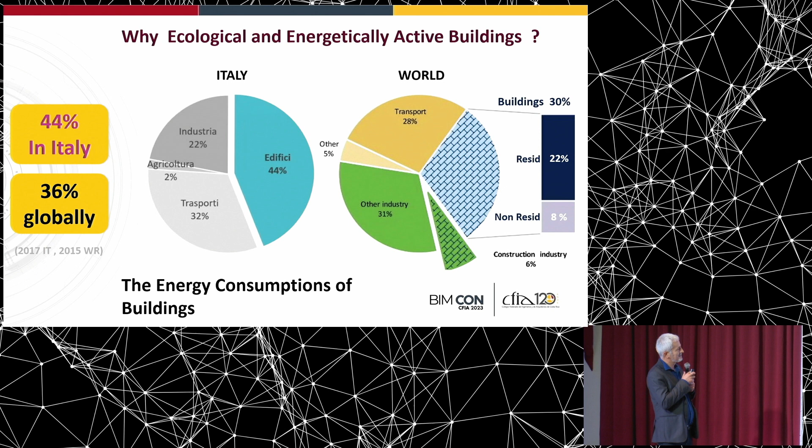What does it mean? Of this 36%, 22% is in residential buildings and 8% in non-residential buildings. It's a lot. And energy is one of the aspects. The other aspects can be measured with different methods, with the ecological footprint or carbon footprint, let's say the impact in terms of CO2. And in this case, buildings account for 39% of the CO2, the GHG emissions. What does it mean?

That it's not only the buildings themselves while they are working with heating, lighting, ventilation and so on. It's also the process to build, sometimes also to demolish the buildings. So the chain is quite complicated. You have to think of a life cycle assessment. So the origin of all these materials that compose the building, the raw materials, the transportation, the manufacturing. Finally, we have the building. We start using the building for 10, 20, 30 years, but then the building has a history and can be demolished, for example, or transformed.

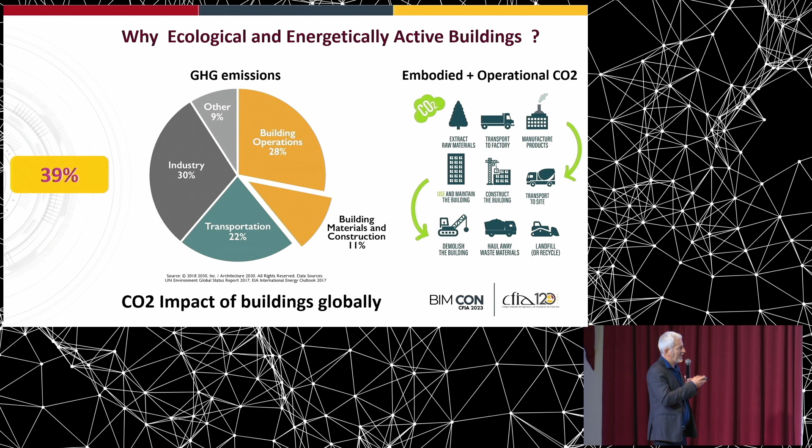Well, to calculate this footprint, this impact in terms of CO2, is complicated. This is the full frame of all the steps in the life of a building, from the original material to eventual recycling after the demolition of a building. And the life of the building is just these two steps. So it's much more complicated to analyze the building before it exists and after.

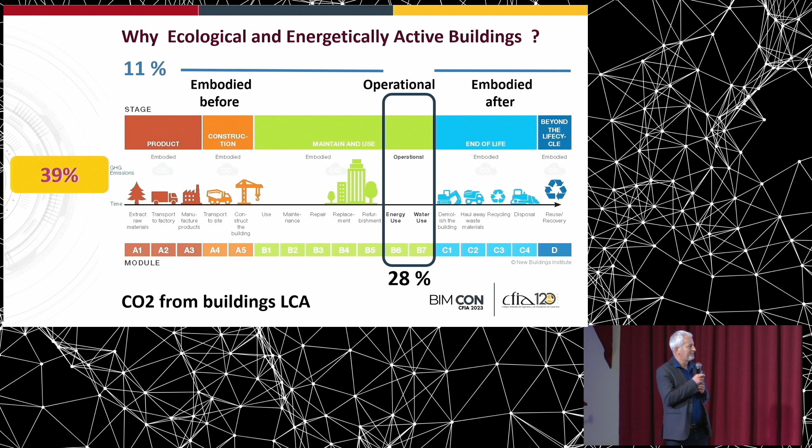Why do we talk about this? Also because we have some targets. In Europe, there is the Energy Performance of Buildings Directive, a new one updated in 2023, that talks about climate neutrality by 2050. But to reach this, first of all the new public buildings in 2026 have to be zero emission, and then all new buildings, of any kind, from 2028 also zero emission.

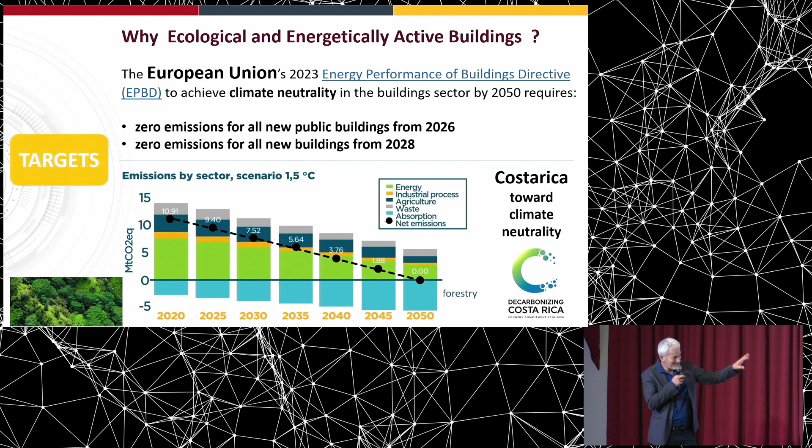What about Costa Rica? There is an interesting plan in your country. I studied it a little bit, and it's very ambitious, because you also have climate neutrality by 2050 with the use of forest compensation, a great resource that we don't have in Italy. But in this analysis, I didn't find the impact of the buildings. It's not considered. Probably it's mixed inside the others.

Then another reason to talk about this: the materials, what we call construction and demolition waste. Consider that in Italy 30% of the waste is construction and demolition waste, coming from the dockyards, the works during construction, or also in the demolition phase. But in some countries it can reach 50% in volume. So it's a huge impact. And inside this construction and demolition waste, we have a lot of material. We will see something about this later.

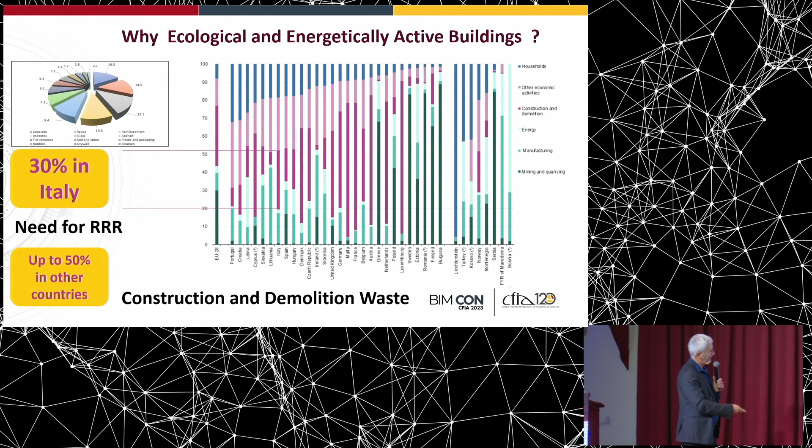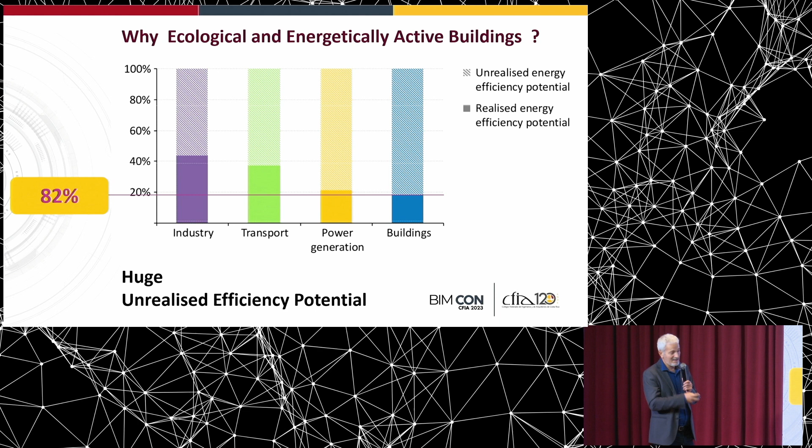And furthermore, there is a huge unrealized efficiency potential in buildings, much more than in industry, transport, and power generation. Why? Because we have already dealt for many years with the efficiency of industry, the efficiency of transport, also the power generation sector, but we did really few things in buildings. So it's time to do it. That's why the research is about the energetically active.

Because around this research we can actually talk about a lot of things, about the transformation from the passive building to the active building. Passive building is a concept, let's say, quite old. Active building means that in terms of energy, the building produces more than what the building consumes. It has to be this mix, in Italy of course, but also in Costa Rica, I think. Anti-seismic measures are needed.

We have to use innovative materials, ecological or either recycled or recyclable materials that don't travel too far, so typical or local and low carbon. Furthermore, we have to apply the principle of the life cycle assessment to analyze any part of the building and the history of each element that is in the building.

Then we have to introduce renewable energy sources and, if possible, connect the building to the other infrastructure or the other buildings around through the model of the smart grid or through the new model, the energy community. And then the building is in a territory, so it has to be compliant with the regulation in terms of urban planning.

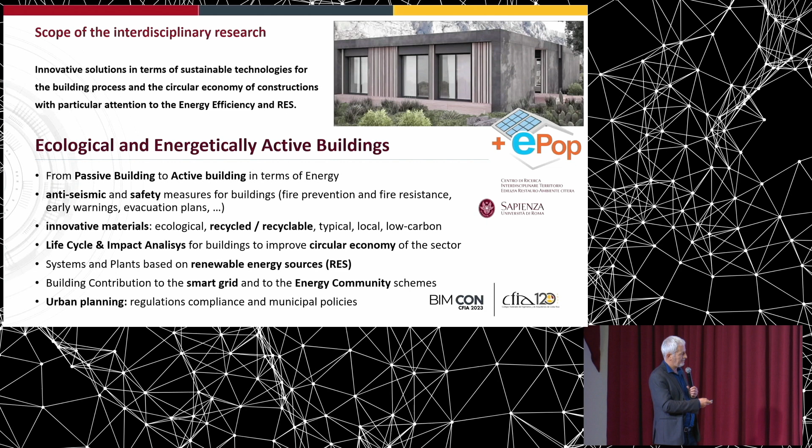Then there is a need of a BAC, a building automation and control system, also monitoring and surveying what's happening inside and outside the buildings. If you want to talk about quality, it's now very easy. There are a lot of sensors that are very cheap to analyze also the VOC and the pollutants that can be inside the building or outside.

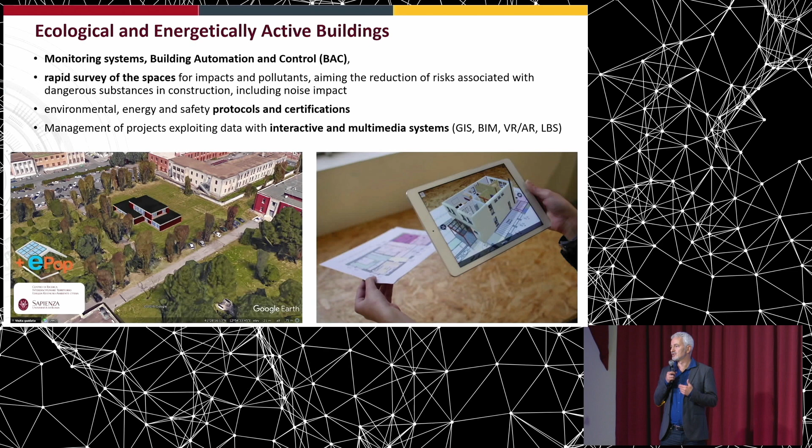There are also a lot of certifications that can assure that the materials are effectively ecological, and environmental protocols that we can apply to a building in any phase of its life. And then finally, the research focuses on interactive and multimedia systems, so also augmented reality in particular, to facilitate the process of the design.

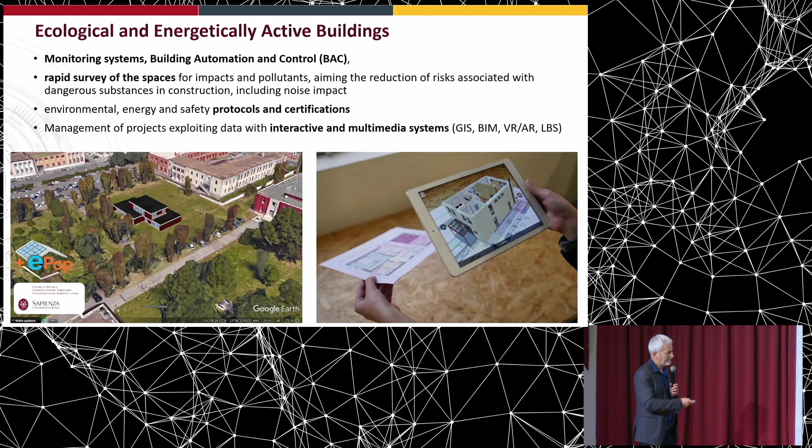The previous research of our team in Sapienza was mainly about the zero energy building. It is quite a well-known concept, or near zero, some say near zero energy building. Well, the challenge is to transform it into an active building, so with a positive contribution in terms of energy. But to have an active building that is also compliant with circular economy, there are a lot of criteria.

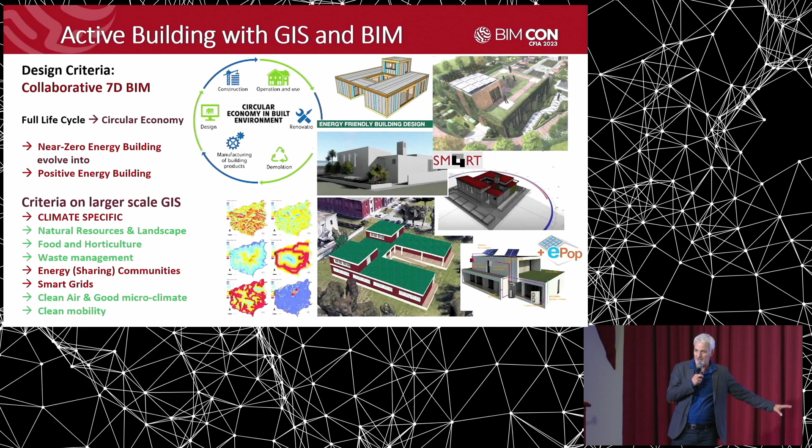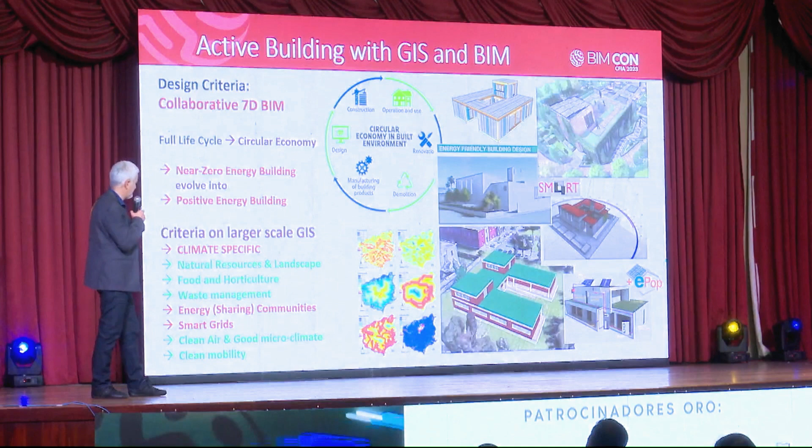And this is not only work that we can do in BIM, this is work that we have to do also in GIS. Because the building, for example, has to be climate specific. A building in Italy is not the same as in Sweden or in Costa Rica, of course. And so these are part of the themes that have to be analyzed around the building.

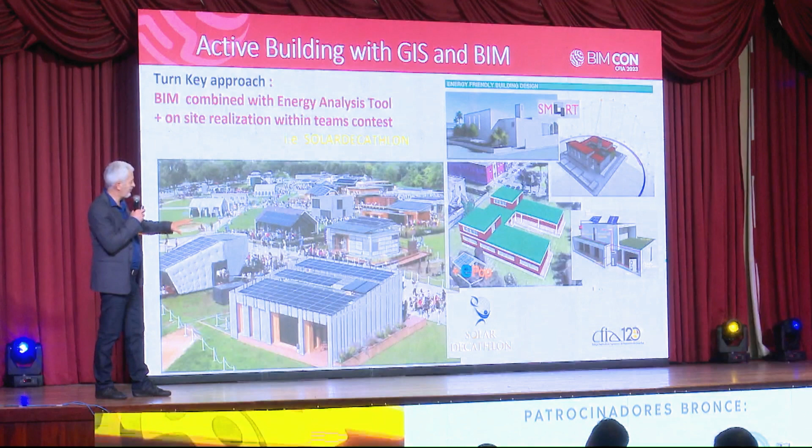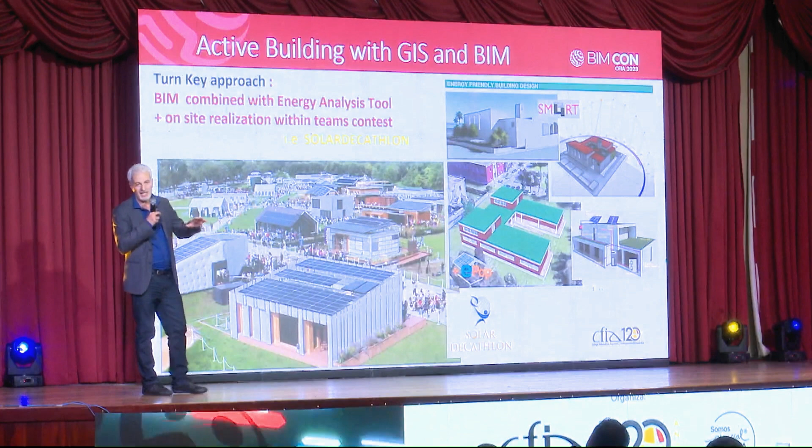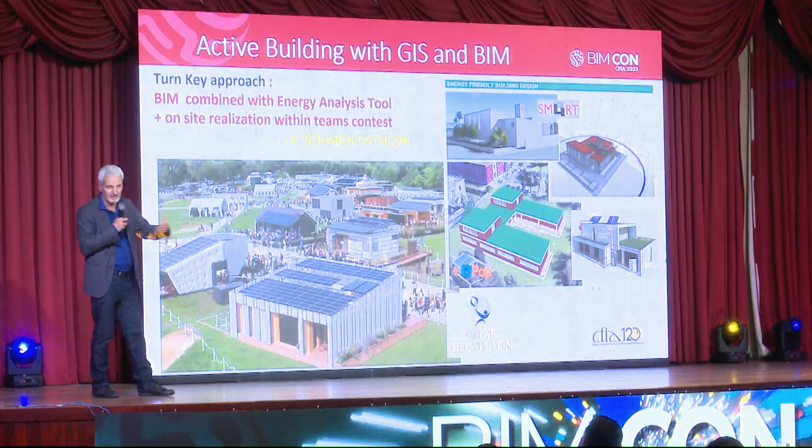Some of my colleagues participated in the Solar Decathlon. That is a competition for fast builds that are realized turnkey, let's say, that have to be energy efficient at the maximum. In this kind of contest, there are university teams, research teams, and it can be in different places. So the challenge is to adapt also the building to the climate, to the conditions of the country.

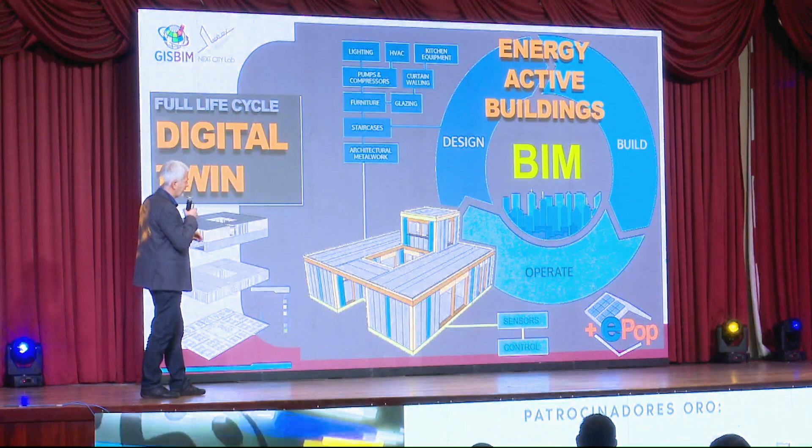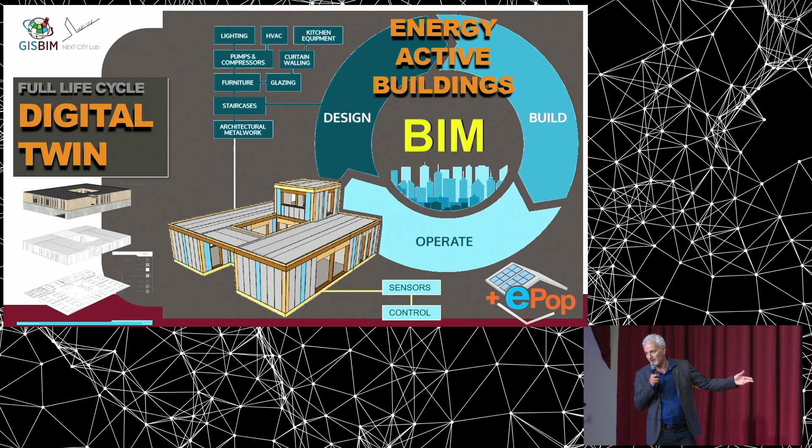Well, what we are talking about is a specific project that we developed with this startup, EPOP, led by an engineering team called Ecomedia, within a consortium with other partners, mainly startups. The idea is to have an energy active building, starting from the design, the simulation of this building, but then also to realize the building. It is not, let's say, the usual university research, which normally stays in the theory. In this case, thanks to the contribution of the startup company, we managed to realize it.

The mission in particular is to realize a building, a wooden structure, complete with plants, of course, that is an active building, so it gives a positive contribution in terms of energy to the neighborhood, and to use it as a living lab. What is a living lab? It's not a new concept. It means that it's a laboratory where you can use the structure itself to test materials, to test plants, to test equipment, so it's something, let's say, more than a normal laboratory.

The idea of the smart living laboratory is based on these three concepts that seem to be the same but are slightly different. The active building; the positive energy block, where block means more buildings that are near each other, because we are talking about sharing the excess of energy; and the idea of the energy community, which is more recent. It's a virtual sharing of the energy that can be made not only by connecting this building to another one that is in proximity, but also through the grid at a certain distance.

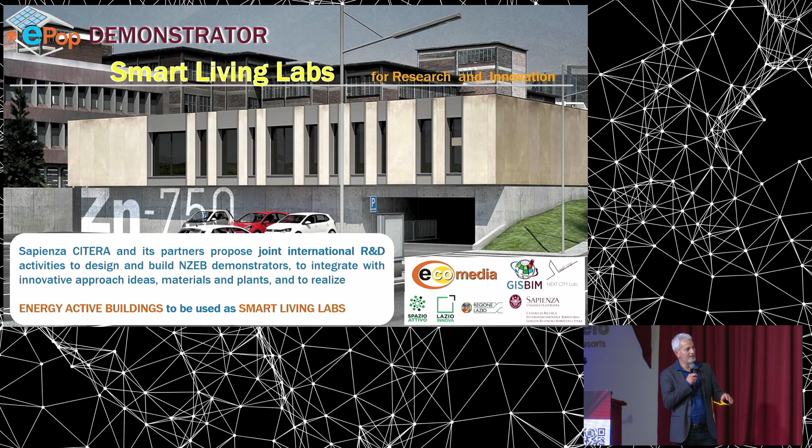Furthermore, we proposed this idea of the smart living labs also in other countries. I will show you also we managed to realize one of these laboratory demonstrators in Italy. Well, this is not a rendering, this is a real one. It's not big, as you can see. It's 120 square meters, but it's working. It's real, and it's monitored since 2 years already.

And it is a passive geometry, so well, very modern as a style. This shape in the entrance gives a solar contribution inside the building during the winter. This is designed for the Italian climate. Should be, of course, different in other places or latitude. There are only ecological materials. It is a class A4 in terms of insulation, of energy efficiency.

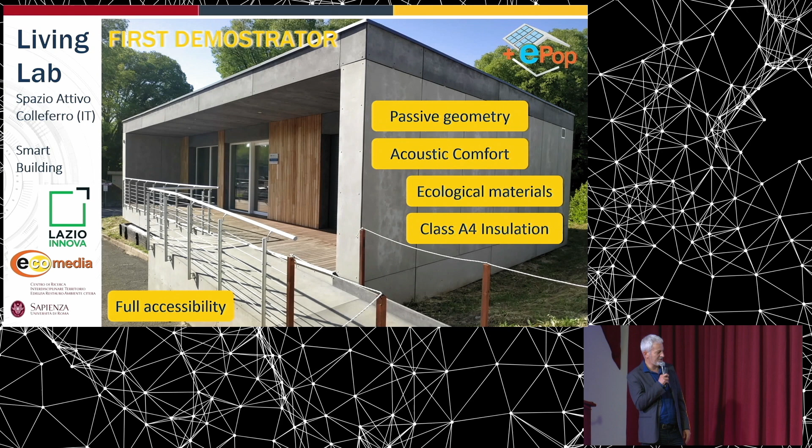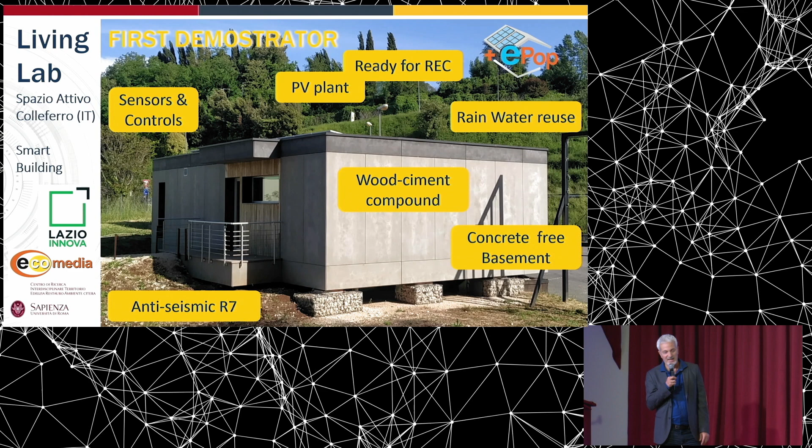Furthermore, there is also an innovation in terms of the basement. It's totally cement-free, so also the basement is concrete-free. It is anti-seismic up to Richter 7. There's all the sensor controls, the photovoltaic plant that is ready for an energy community, the reuse of the rainwater, and something more. It was a little bit too long to list all the technical specifications.

Then it is a smart building in the sense that it is connected. Of course, it is monitored and it is also controlled from remote. And it's possible to verify the performance. So the performance in terms of energy, of thermal losses, of the acoustic comfort, and the internal air quality. But it's also possible to test, and that's the interesting thing that will link us again to the BIM.

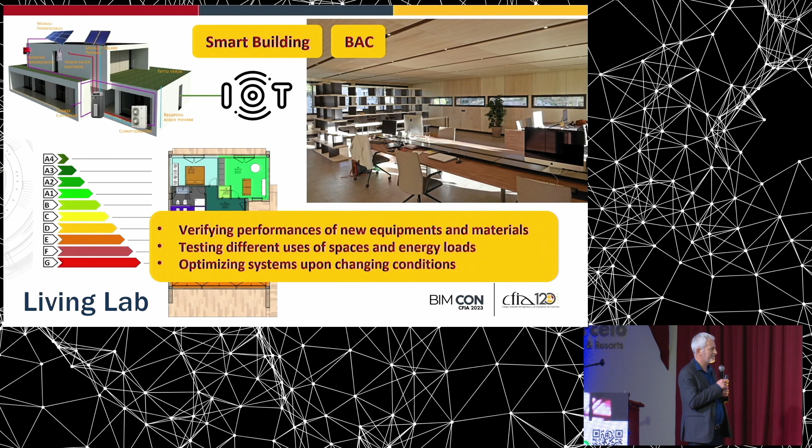It's possible to test new materials, introducing new equipment inside. So in the BIM we can simulate the materials, the component, the equipment, and in the living lab we can try it and then measure and verify. So it is a digital driven process, as you can understand. Let's start with an in-house BIM solution. So it's not a famous BIM, it's a BIM online that has been created to use this specific component and to realize this kind of project, of buildings.

So all the components are modular and are based, of course, on a library, so the common data environment. In the second phase, it uses, of course, BIM more well known as Revit or SketchUp that has several BIM plugins. And why this? Because all the components have to be sent to the factory that will cut the pieces, prepare all the pieces to build our construction.

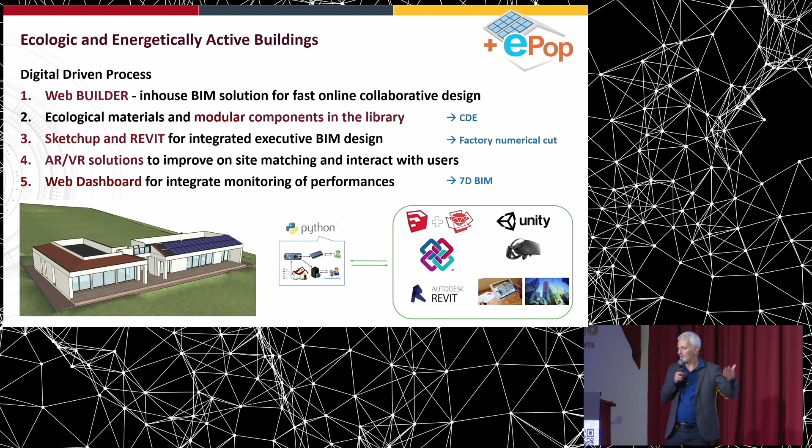Then there are some Python developed hardware solutions. For example, to improve the site matching, so you can go in the place where to build and view with an Oculus the building before the works start. And also the users or the future, let's say, customers that this solution could have can interact with the design, with the project. At the end, there is a dashboard to see all the performances, so the integrated monitoring.

This is the simplified BIM software. This is online, only online. Simplified in the sense that you can directly work in 2D and include in the design the components that come from the library that has been selected for this kind of building. So some different kinds of wood, some different kinds of finishes, some different kinds of element of any part of the design. Well, why modular? Because all the process will be much faster.

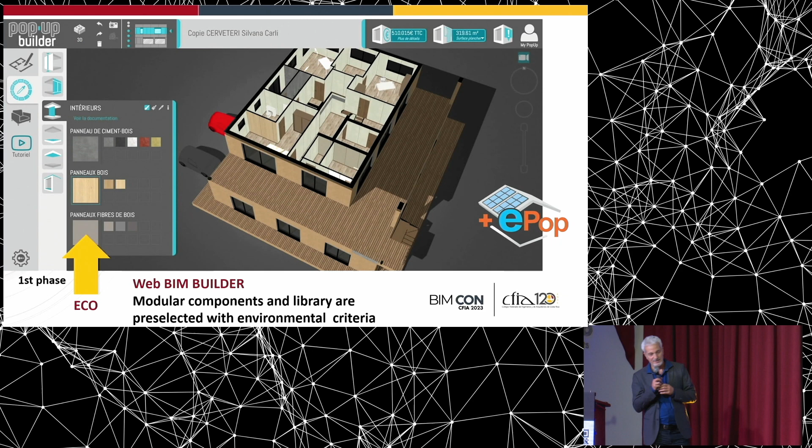The same online software, developed by a French partner, a startup, produces directly the cost analysis, automated in real time. Each time I introduce new pieces in my design, with the calculation, including also the simulation of the cost for the installation works related to all components.

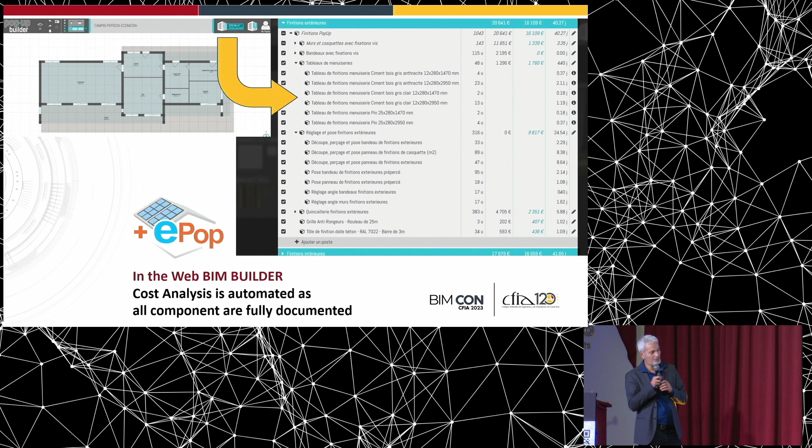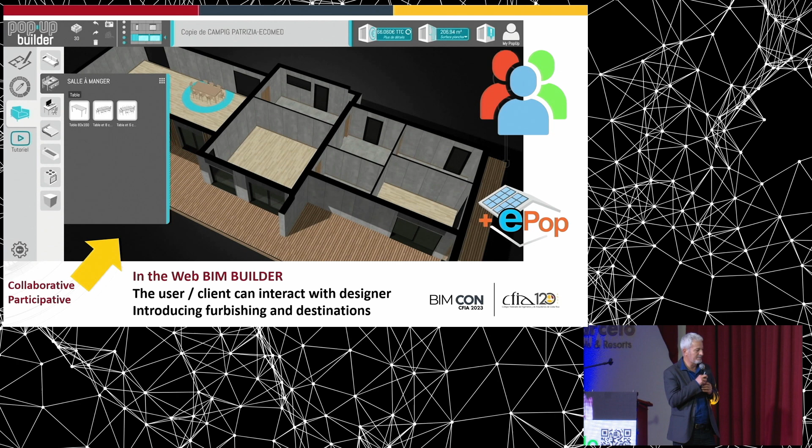And furthermore, there is the possibility to introduce also elements of furniture and to work together with the users. So it means that not only the designer will use this, but it is multi-user, so also the users or the customer can introduce quite easily their ideas inside the project. So interact with the designer. In the second phase, there is the transfer of all this data to traditional BIM software, and also do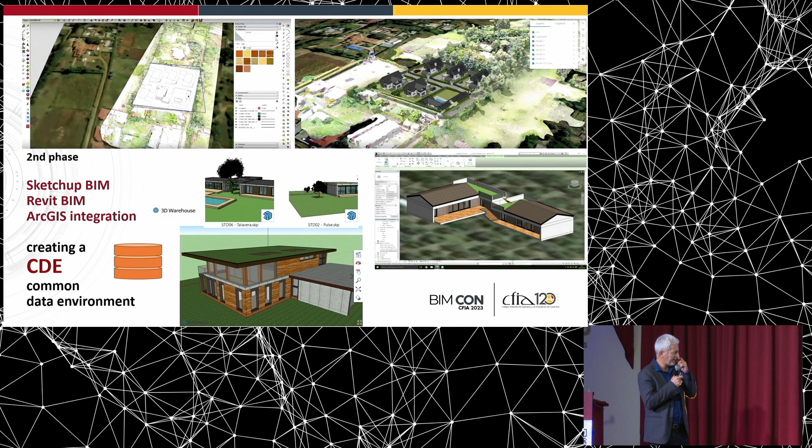Knows very well the information, but the information has to be included. Someone has to bring this information to the project. I create a wonderful 3D model of information. Information means that all the components correspond to some material. Material has to be absolutely well documented. And in the case of ecological building, so an energetic building, of course, all the components have to be compliant with the sustainability approach. So all the ecological material has to be certified.

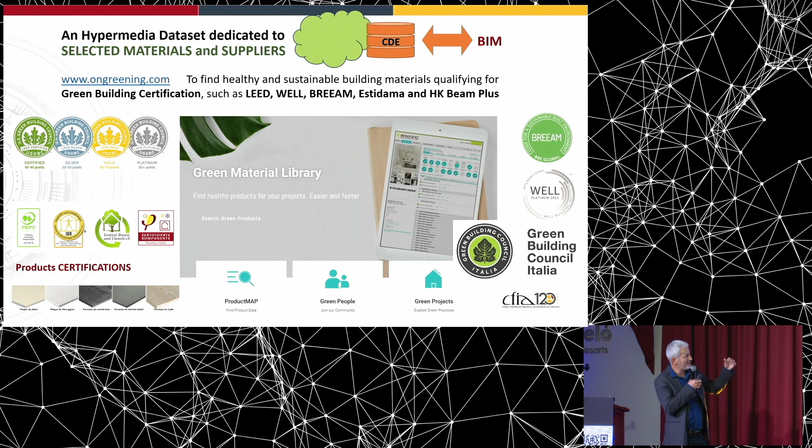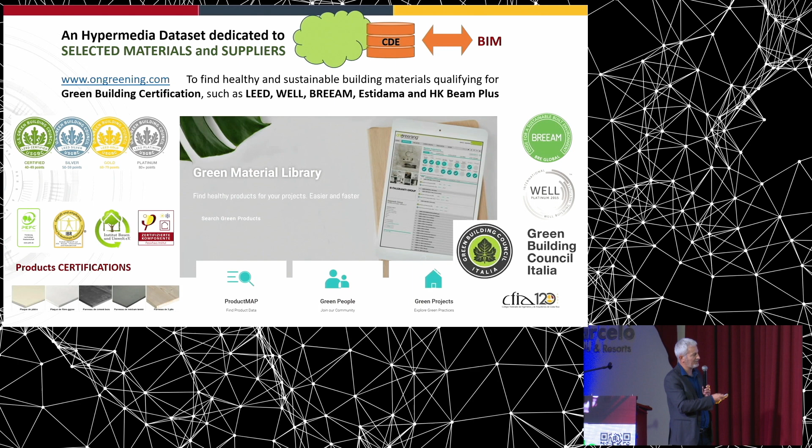Web resource that describes, for example, more information about these materials. For example, in the case of the certification, you need also to see which kind, because there are many certifications in green building. Well, the most known is the LEED certification, but we have also BREEAM or WELL certification, and then all the single products that can be certified. But having so many certifications, it means that you have to know, to understand what each one of them means. That's why it's important to follow all the links.

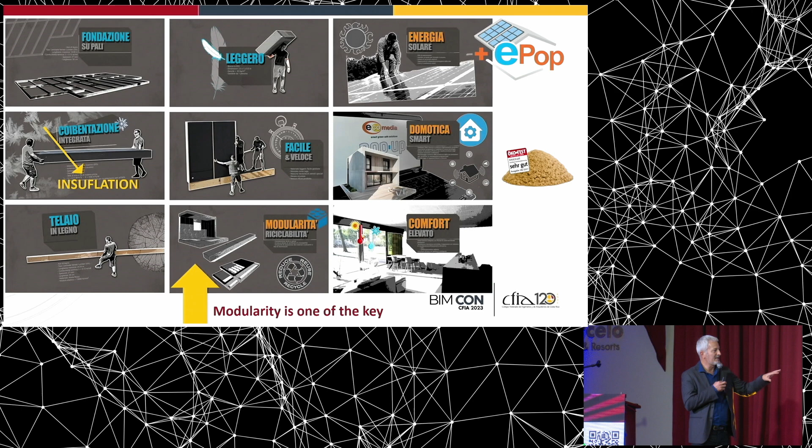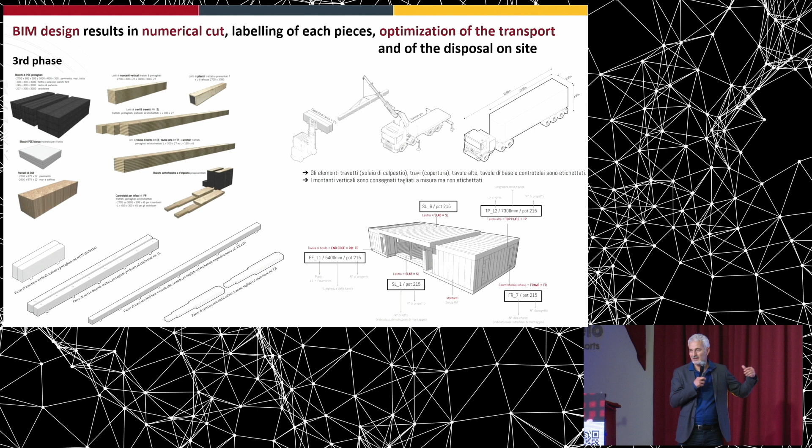Well, the concept of the modularity is one of the keys of this building solution, and we will see why. This is one of the reasons. Each of the components of the wooden structure has been numerically cut directly from the information of the BIM, but then it is labeled and at the end delivered in the place where the work has to start in a certain specific way, to make all the construction easy and the whole process very fast.

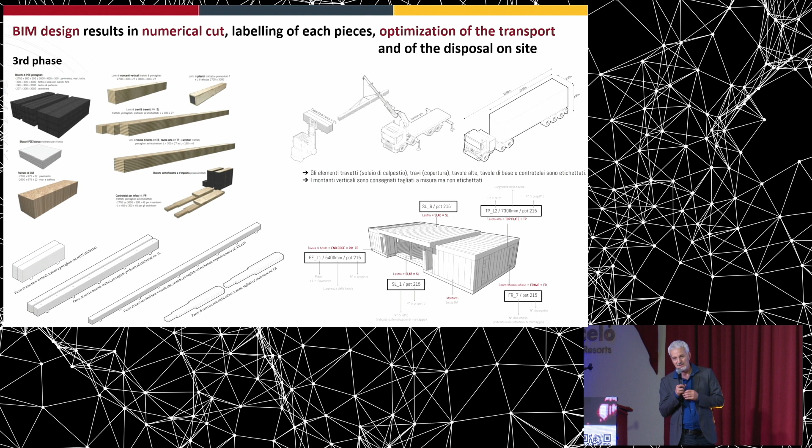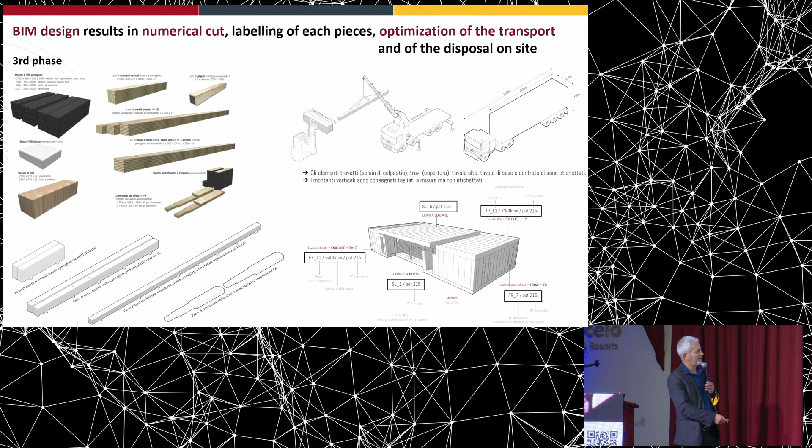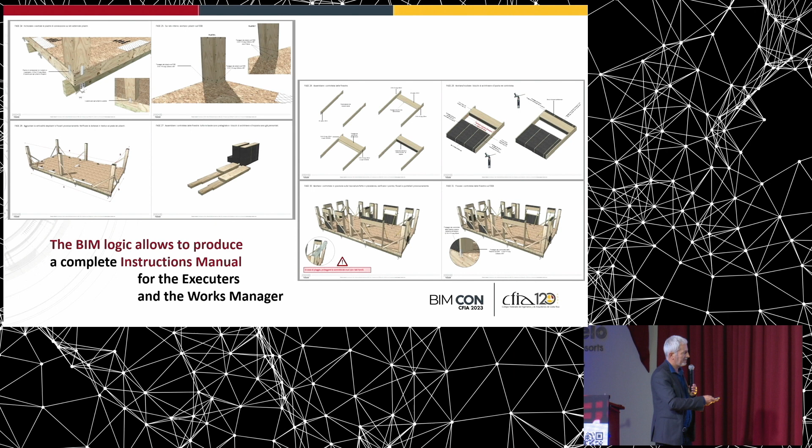Furthermore, also the transport has to be optimized, of course, and it's something that can be very complicated to manage. Well, at the end, the BIM logic allows us to produce a full instruction manual. Why this? Because one of the purposes is also fast construction. I mean that only 4 persons will build the house. And in the experience that we had in the first prototype, 4 persons built this house in less than 2 days. It means that the process is really working. But they need a construction manual, otherwise they will not find the pieces, they can make some errors.

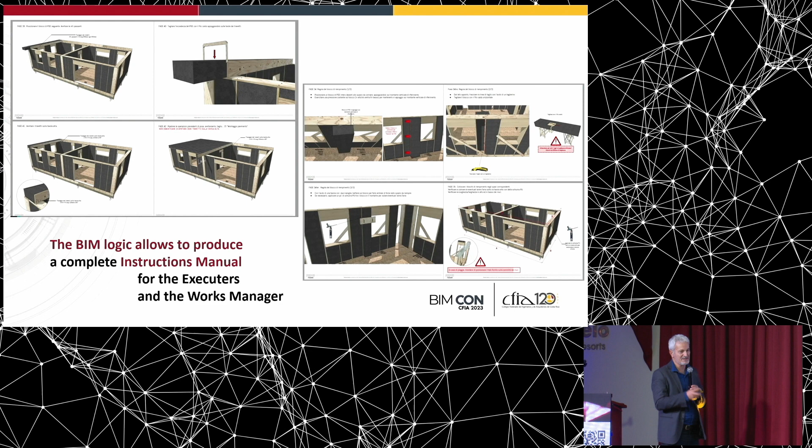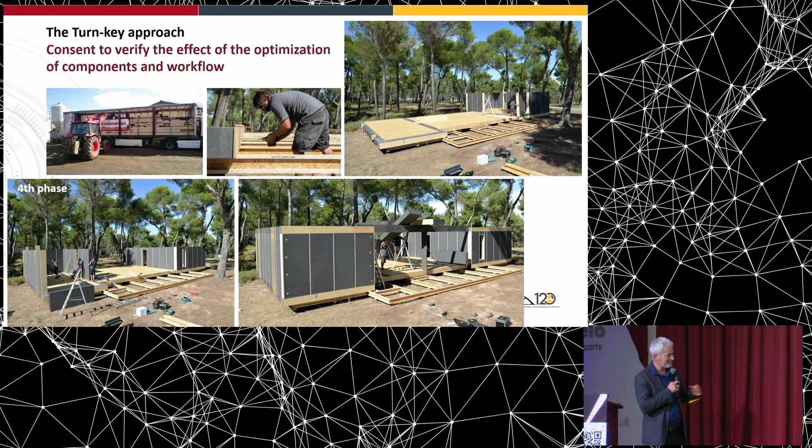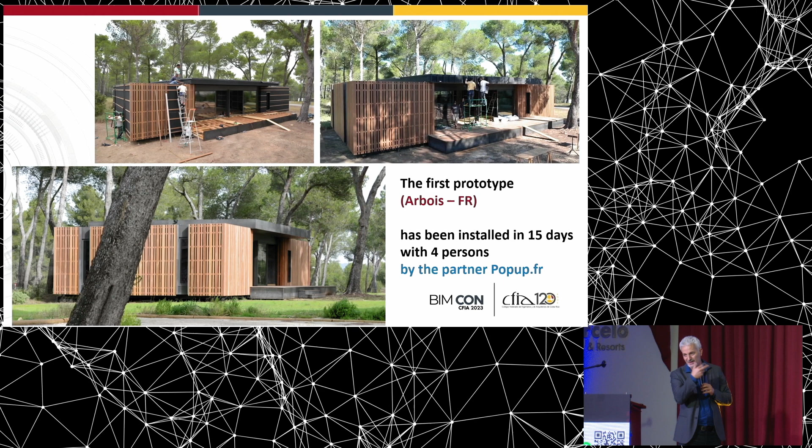Imagine that for a very simple building in wood like this of 150 square meters, there are 90 pages of construction manual. Well, this is in real. The first prototype has been built in 15 days. This is the result. The first prototype was built in Arbois, France. Then we built our living lab in Colleferro, that is next to Rome in Italy.

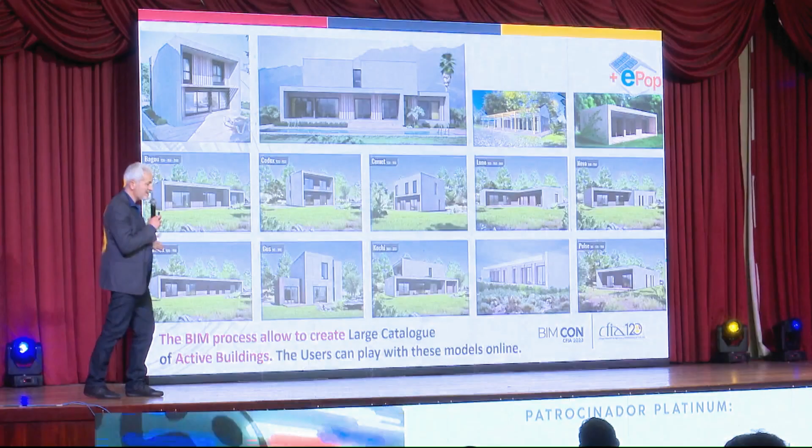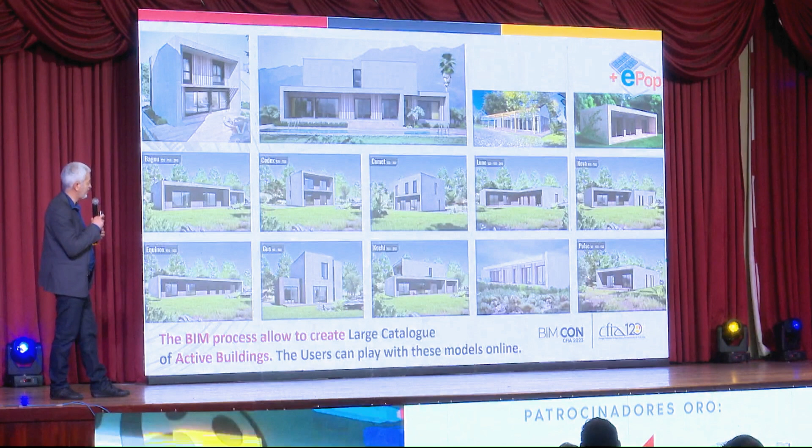Strength points: fast building, accessible quality, because also the price is quite interesting, an impact also on the cost, the domotics, the acoustic comfort, and at the end the BIM process allows to create a very large catalog of solutions with different materials, different shapes, all optimized in terms of velocity in construction and costs, but the performances in terms of energy and low carbon.

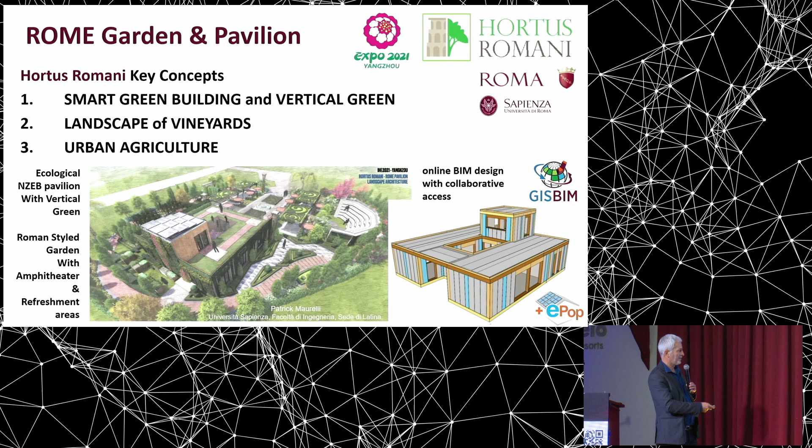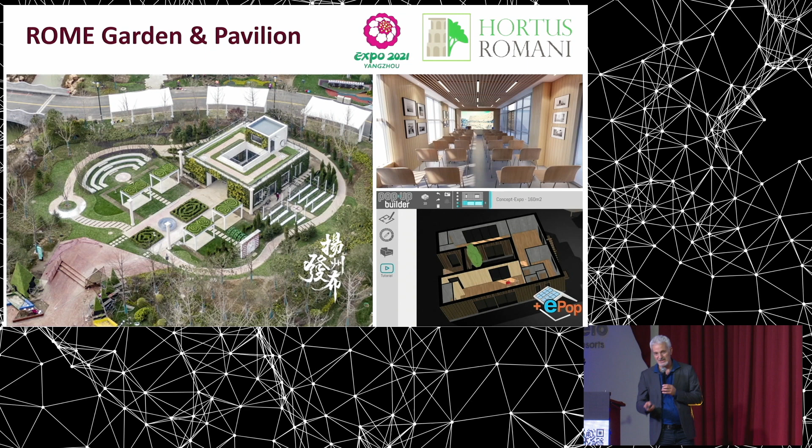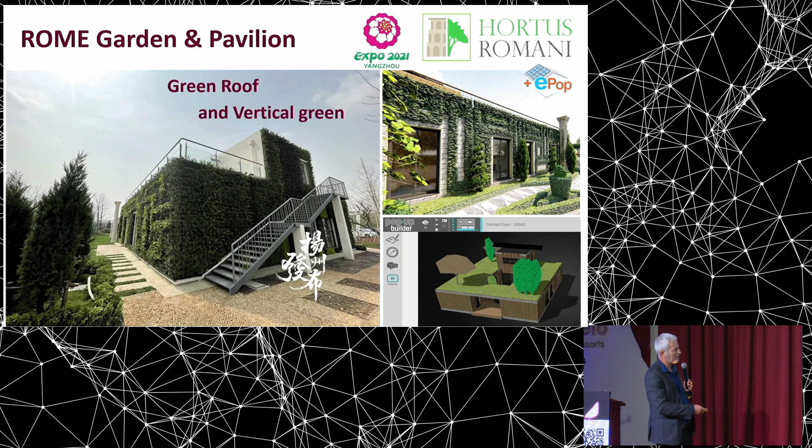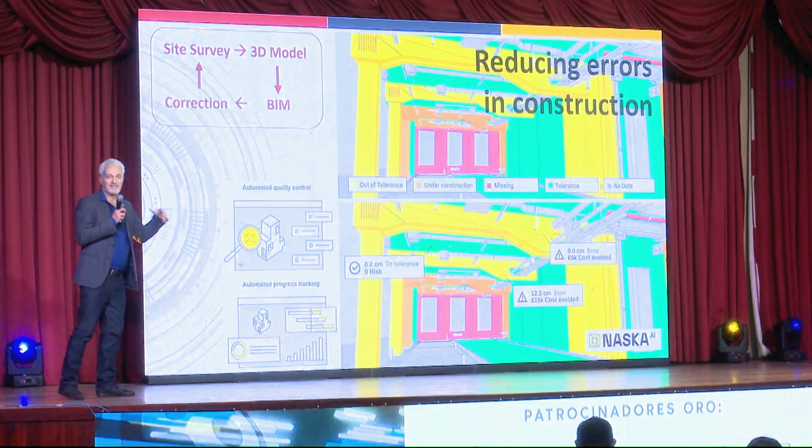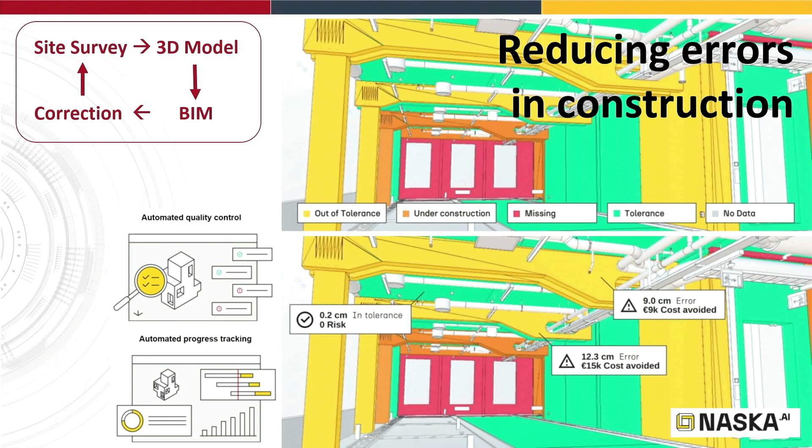Por supuesto, el edificio que ha sido concebido con todos los materiales ecológicos también puede ser transformado. ¿Y cuáles son sus planes hoy, entonces? No tiene que ser demolido.

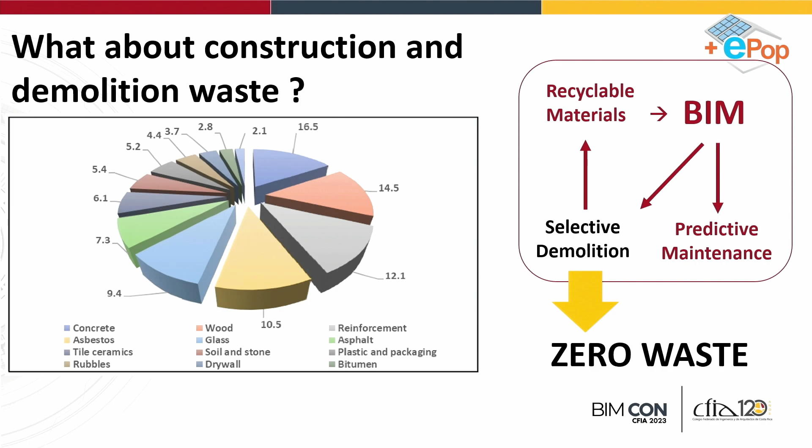No, fue increíble, ¿verdad? La vez pasada nos miramos así, como que nos miramos. Y yo como, bueno, probablemente aquí mismo.

Esto es muy sencillo para nuestro pequeño edificio, pero pueden imaginarse ustedes un edificio como este, no es diferente.

Yo estaba relajándome aquí, pero no, yo estoy bromeando.

Si ustedes tienen bien documentado todo este material, cuando hagan la demolición selectiva, lo más complicado, como los asbestos, los escombros, las envolturas, pueden ser separadas y al final pueden obtener cero residuos.

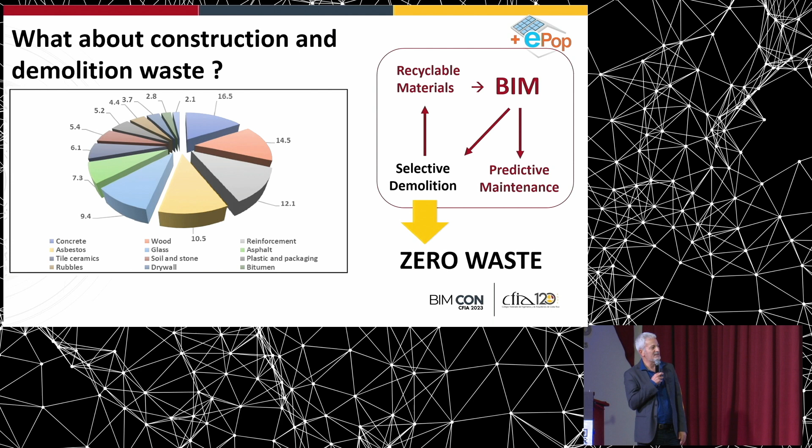Eso es, bueno, ya ambiciosa.